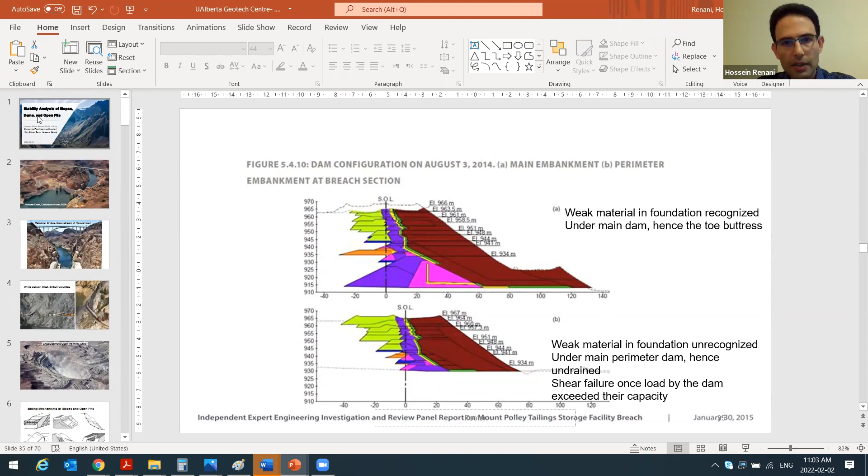Thank you very much, Lan. It's a pleasure to be back at the University of Alberta and share some of what I have learned in the past with my fellow students and professionals who have joined this meeting. Welcome, everyone. If you can please confirm that you can see my screen, I can proceed. Yes, I can see your screen very well. Can you make it in presentation mode? Great, okay, perfect.

So it's a pleasure to be here. Welcome, everyone. Today I'll be talking about stability analysis, which is a big part of what all of us geotechnical engineers have to do as part of our professional practice. It can be an important responsibility, and a lot of considerations have to be taken into account when doing these kinds of analyses. So today I'll be talking about slopes, dams, and open pits. After I wrote this title, I realized I'm going to be covering a lot of different ground. It's a very tall order, and each of these subjects could be covered in a full course or many books. So what I'll be presenting is just a brief look at each of these subjects, not extensive or exhaustive, just some parts of each problem that have been interesting to me and that I wanted to share with you today.

Before I proceed, I'd like to acknowledge some outstanding individuals who have contributed to my growth professionally and personally, and who have also informed some of the ideas I'll be presenting today. I'd like to acknowledge Dr. Derek Martin and Norbert Morgenstern from the University of Alberta, Dr. Evert Hoek, Dr. Ming Cai of Laurentian University, and also Dr. Loren Lorig and Pedro Varona of Itasca, as well as my colleagues at Klohn Crippen Berger, SNC-Lavalin, and BC Hydro. Now, what I'll be presenting today are my own views, and they may not represent the views of any other individuals or institutions I have represented in the past.

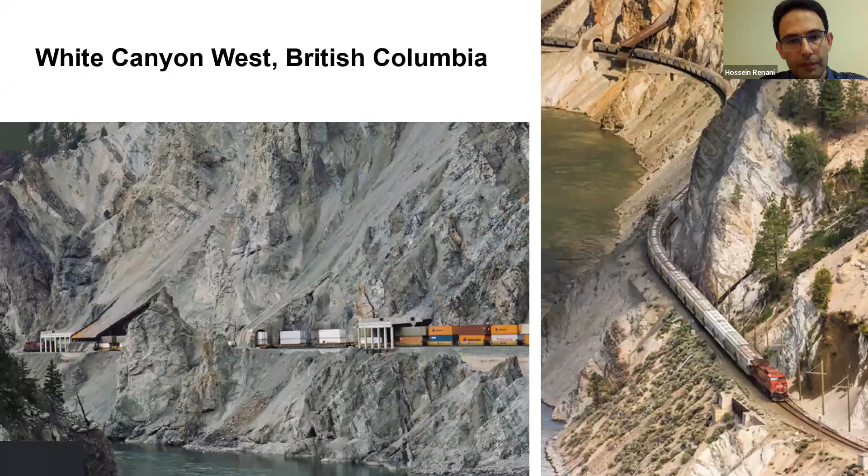And this is another example. So this is White Canyon West in British Columbia, and we have the CN Rail here. You can see that it's going very near the toe of a very high rock slope, and here you can see the train going through the loops. It's a very important route, and it's very important that these rock slopes stay stable and don't pose undue risk to the rail.

So again, that would be one of the topics and structures that we will cover today.

Okay, I just want to confirm this bar that I see below, is that blocking your view of some of the pictures, or do you see it without any? No, there's no obstacles, it's perfectly clear. So yeah, it's only on my screen.

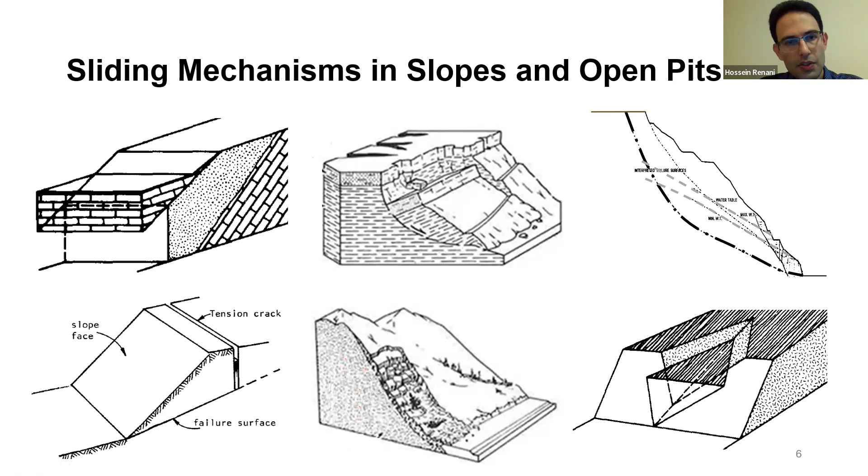And lastly, at the bottom here, I'm showing an example of a wedge failure, when we have two intersecting features creating a line of intersection which can daylight out of the slope face, and again, it's steeper than the friction angle of the surfaces, so it can slide out. This is the type of failure that we may observe at the scale of individual benches within an open pit mine or near a cut in rocks. As you can see, there are many different names and many different geometries, but as I'll mention later, they all have one thing in common.

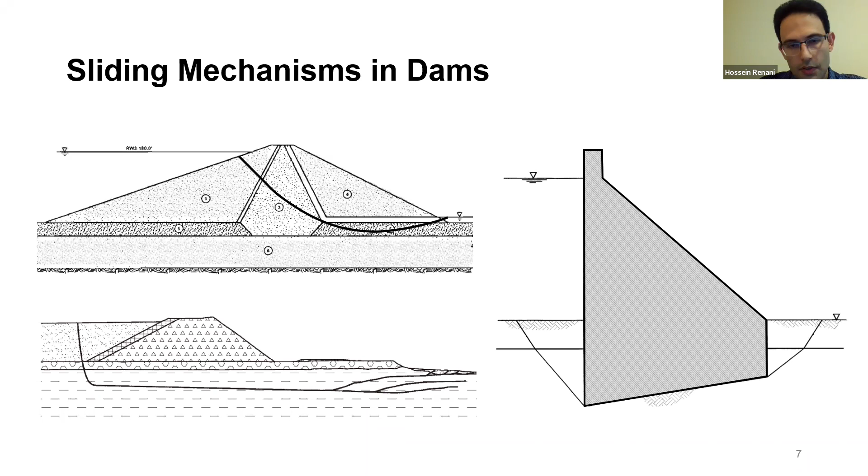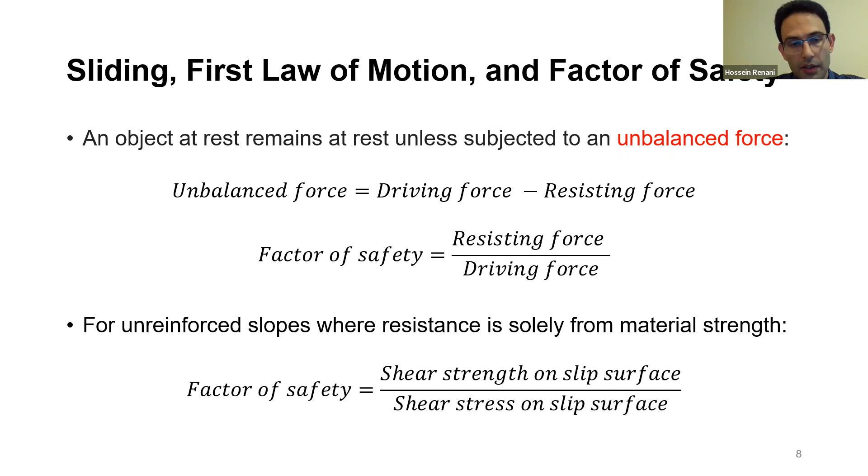However, if we do have some reinforcement, this equation has to be modified to the more comprehensive equation to calculate the factor of safety. That would be, for example, in a case where we have a dam and we need to stabilize it using some anchors or piles or what have you. That's when we use this kind of definition. But for many pure geotechnical applications, for example, if we are just looking at the body of a dam or embankment, which is not supported, this definition is adequate.

So now how do we calculate this factor of safety? There are different methods, obviously. Let's start with limit equilibrium analysis of wedges. Limit equilibrium analysis considers the condition of the system at the point of limiting equilibrium, meaning at the point where it's about to slide, but not yet, where those forces are at equilibrium. So we can have, for example, a single wedge analysis.

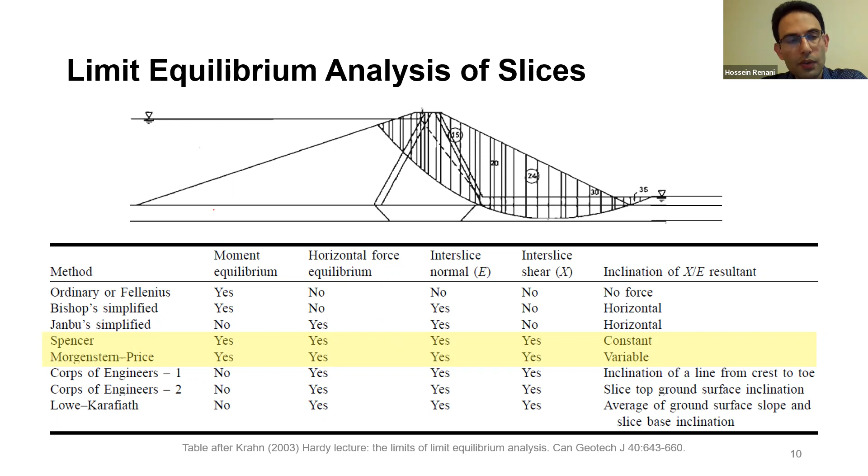So let's step back and see the main benefits and disadvantages of the limit equilibrium method of slices. The first advantage is probably that it's very simple and quick, and it requires few input parameters. Essentially, once you know your loads, the densities of materials, and shear strength parameters—cohesion or friction, or if it's nonlinear, Hoek-Brown parameters—you're good to go. And many engineers are familiar with this method, so there's less risk of making mistakes in the process.

However, there are some disadvantages which in some cases may be quite important. These limit equilibrium methods do not provide any information about displacements. Usually when we design any structure, we have some stability limit states, which consider the stability of the system—we call them ultimate limit states. We also consider serviceability limit states, which have to do with the amount of displacements or deflections induced in the system. So by virtue, this limit equilibrium method cannot help us with serviceability because it cannot give us any information about displacements.

It's only for ultimate limit state considerations. So it just gives us the factor of safety.

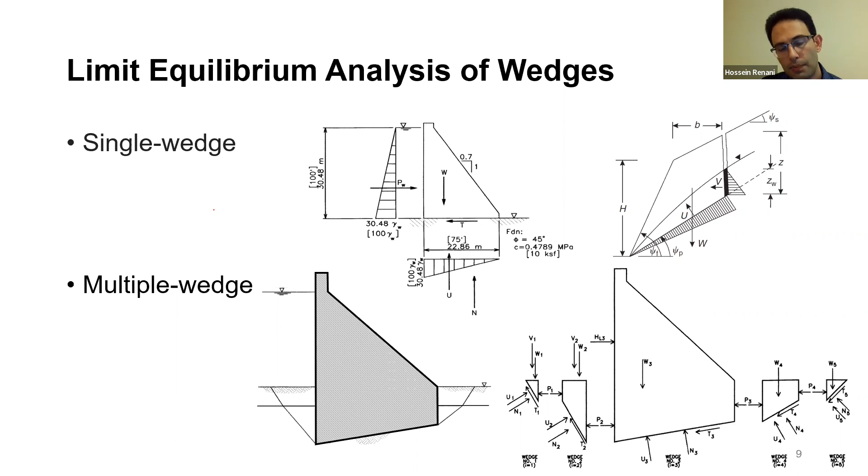So these strength values that we usually use as ultimate strength values are not strain compatible. They are not mobilized at the same strain. It is very possible that after slip has occurred on one interface, the strength on another interface mobilizes. So the way we currently do limit equilibrium analysis, neglecting the effect of strain, may not be quite correct in some cases.

Another drawback in my view is that it requires a trial and error search algorithm to find the critical slip surface, and that can be quite challenging for complex systems. If we have just a simple slope with one material, it's quite easy, and the search algorithms can quite easily find the critical slip surface.

However, if you have multiple discontinuities, a complex topography, and multiple materials in the slope, it can be quite an extensive and manual process to try different types of slip surfaces that you define as a user and find the most critical for yourself. Sometimes a modeler or engineer cannot find these most critical surfaces. I have reviewed many hundreds of stability analyses, and in most of them, by taking a closer look at the model, I have been able to find more critical slip surfaces. So this is a non-trivial concern for complex systems.

Now, the other drawback in my view is that it assumes the same factor of safety for all slices. Again, when we have a complex system made up of different materials, it may be possible that the strains are initially concentrated in one part of the system, overstressing them, and then propagate upwards, something close to a progressive failure. So the factor of safety may not be equal for all the portions on the failure surface.

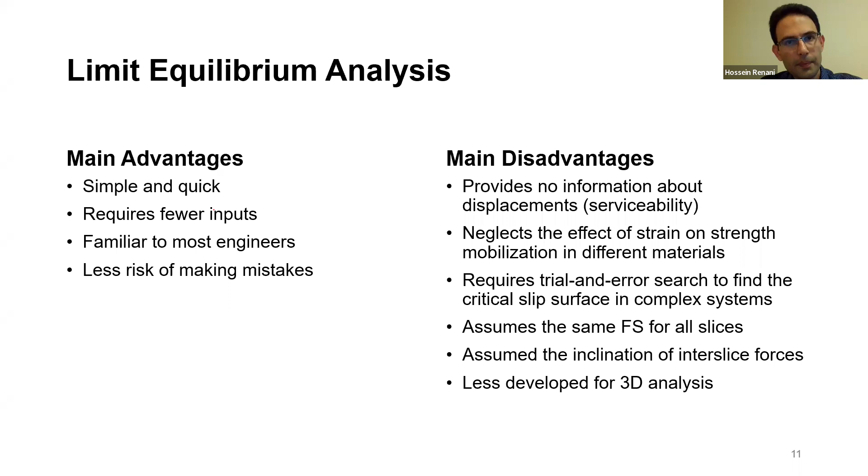There is another method that we can use, called the shear strength reduction method, to calculate the factor of safety of a system, whether it's a tailings dam, a rock slope, a soil slope, or an embankment. And there are a few steps.

First of all, we have to do a proper stress deformation analysis of the system with the original parameters of the system that we know are representative. Once we bring that system to equilibrium, we go through that shear strength reduction algorithm where we divide the shear strength of the material by a strength reduction factor.

As you can see, generally we can specify shear strength as a cohesive component and a frictional component. Here I have written it as a Coulomb type linear slip criterion. However, even if it's non-linear, we can translate it into an equivalent linear form, so this method still holds for nonlinear failure surfaces as well. Essentially we divide the cohesion and tangent of friction angle. By doing so, you can see from this equation that we are reducing the shear strength by that strength reduction factor. We then check if, with those reduced cohesion and friction angle values, we still reach equilibrium of the system or not.

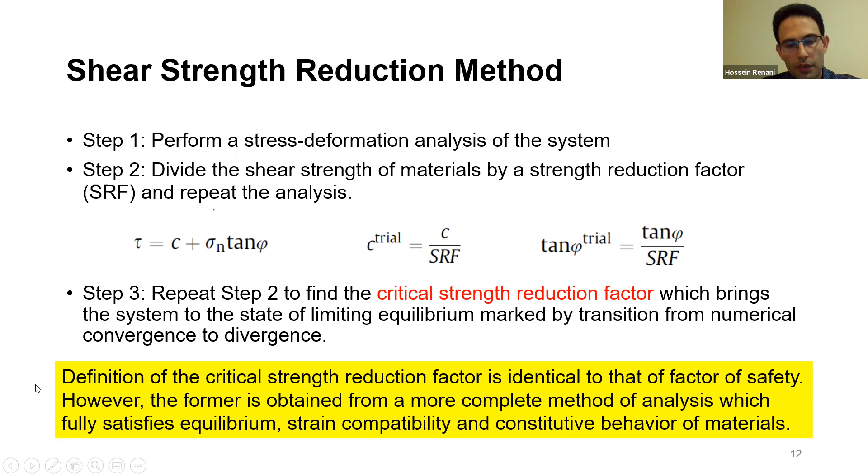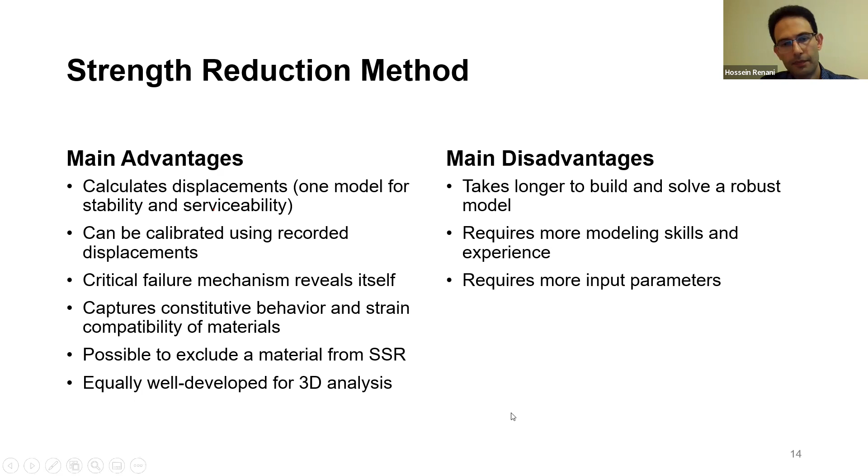So how do the results compare in 2D between these two methods? In my experience, limit equilibrium analysis and strength reduction method give similar results when we are dealing with 2D analysis of simple slopes, where the slope geometry and topography are simple, and the material is maybe homogeneous, or we have two materials, but the slip surface is quite smooth. In these cases, we get quite similar results from these two methods.

For example, here I have used a finite element model to calculate the factor of safety with shear strength reduction, which is 1.24. With limit equilibrium, it's 1.27. So for most practical purposes, they are the same.

However, if we have complex geometries, or where our material behavior is complex, or where we have a slip surface with some sharp changes - for example, here is close to a 2D section of the previous 3D excavation model that I showed you. We have part of the slip happening on the weak bedding plane, which is quite straight, and then a sharp change into failure of the material above. So we have a hybrid failure mechanism, and as you can see, we can get substantially different results. In this case, limit equilibrium gives us a factor of safety of 1.86, whereas shear strength reduction gives us 2.16.

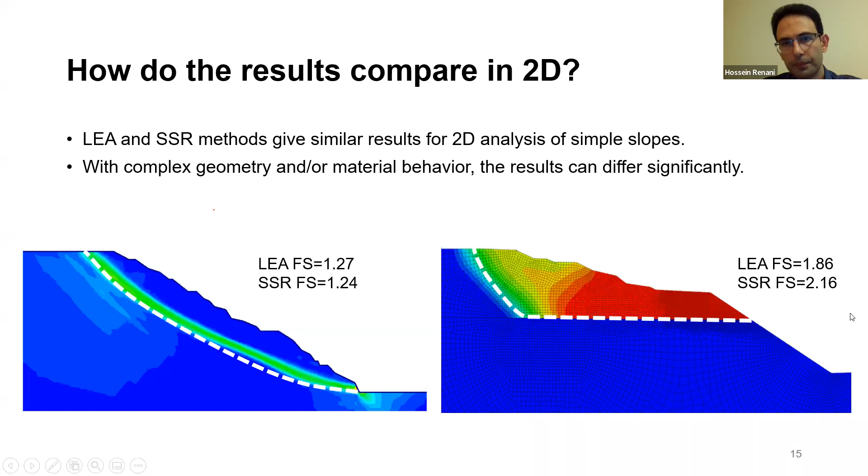Now, what happens when we go from 2D to 3D? Again, in my experience, as long as the slope geometry is simple, materials are simple, homogeneous, or close to it, the results are going to be similar in many cases. However, if we have complex systems, the results again can differ significantly.

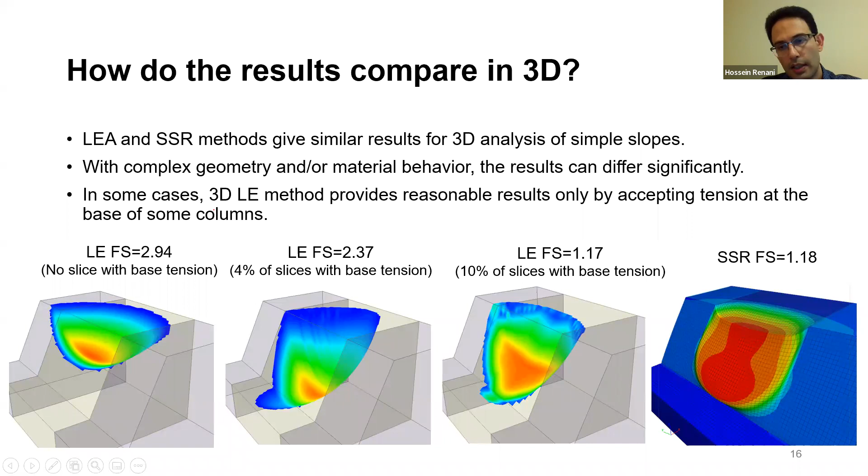All right, let's move to incorporation of strain softening. With limit equilibrium analysis, we can only assume one set of strength parameters because we have no displacement. So we specify one value for cohesion, for example, and one value for friction angle, and those are the values that are going to be used in the analysis. They won't change during the analysis.

However, in many cases, we have strain softening materials. So for example, this is one case of yellow clay reported by Skempton, where you can see at different levels of confining pressure or normal stress, we go up, we reach a peak, and then we come back. This is what we call strain softening. With increasing strain, the capacity of the sample reduces. So this would be our peak, and this would be close to post-peak. And if we continue this strain long enough, we get to residual.

So for each level of normal stress, we can get peak values and residual values. And if we plot them, we can get something like this. This is done for a blue clay reported by Alonso and Gens. So we can get one failure envelope for peak strength of the material and one for residual strength. And the question is, what do we do with this?

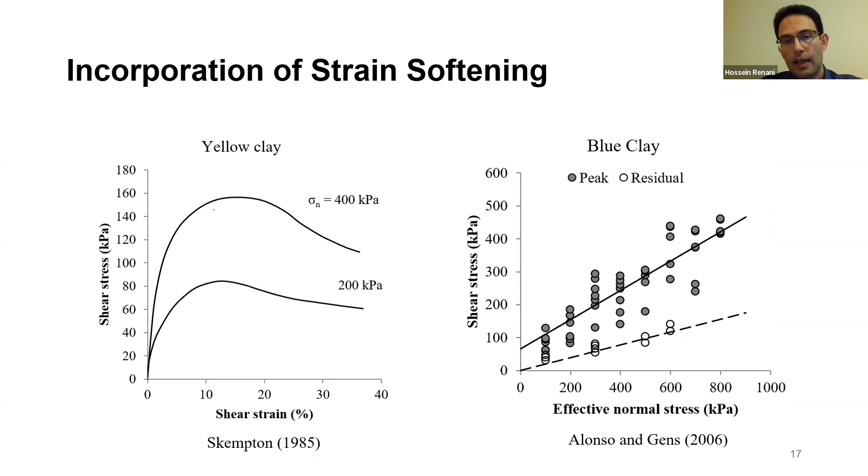In limit equilibrium analysis, we have to choose one set. And what usually has been done is that the peak values are chosen. However, we understand that that can cause some unconservative design, and in some cases, it has resulted in failures. So how do we solve this problem? How do we take this kind of behavior into account when we do limit equilibrium analysis? The answer is that we can't.

We can, however, incorporate it within the framework of a full stress deformation analysis, as we do with shear strength reduction method. So for example, here I have shown the slope, which is made of material which is strain softening. So we have our strength parameters starting from a peak value, and then as our plastic shear strain increases, they will be reduced, and then after some point, they get to a residual value. So those will be for both cohesion and friction angle. We go from peak values to residual values as plastic shear strain increases.

So if we assign such behavior to the material inside the slope, these are the kinds of responses that you can see. If we apply some normal force to the top of this slope, we can see how the load displacement behavior differs from a perfectly plastic model. PP stands for perfectly plastic. So as we increase the vertical stress, which is applied here, we can see that vertical displacements increase, and after some point, they will plateau because we have a perfectly plastic model. And that's what perfectly plastic means. It works also in the framework of the slope.

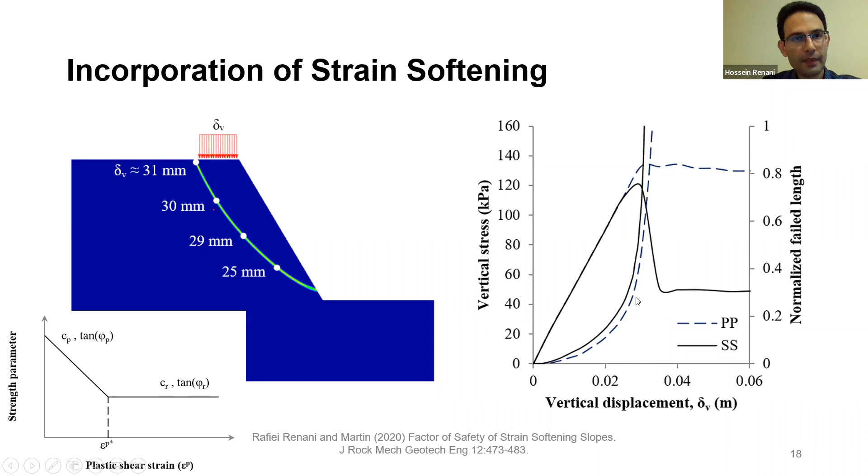So how do we incorporate this into the context of factor of safety? Essentially, we can do the same thing we have done for perfectly plastic models. For those models, our strength parameters, C and phi (tangent of phi), are constant — they do not change with plastic shear strain. If you draw them on this kind of plot, you'll have horizontal lines. So if our initial representative values are here, when we apply a strength reduction factor, they will be reduced — this line for a given SRF will come down to this line. Then we check if it's stable or not. If not, we decrease it further.

We can do the same where we have a strain softening material. However, they are not going to be horizontal lines — as I mentioned, we will have a decrease initially, and then get to a plateau. This plateau can be, for example, 0 for cohesion, but a non-zero value for friction angle. So for a strain softening material, with this kind of trend initially, a strength reduction factor greater than 1 will reduce it to something like this. We can do the same exercise for strain softening that we have been doing for perfectly plastic models.

This is an algorithm that we published to establish a framework to calculate the factor of safety for slopes or systems with strain weakening materials. On the right, you can see the effect. These two lines are for the perfectly plastic model — we have a slope with no loading on top, just the gravity loading of the slope itself, as it is in reality in most cases.

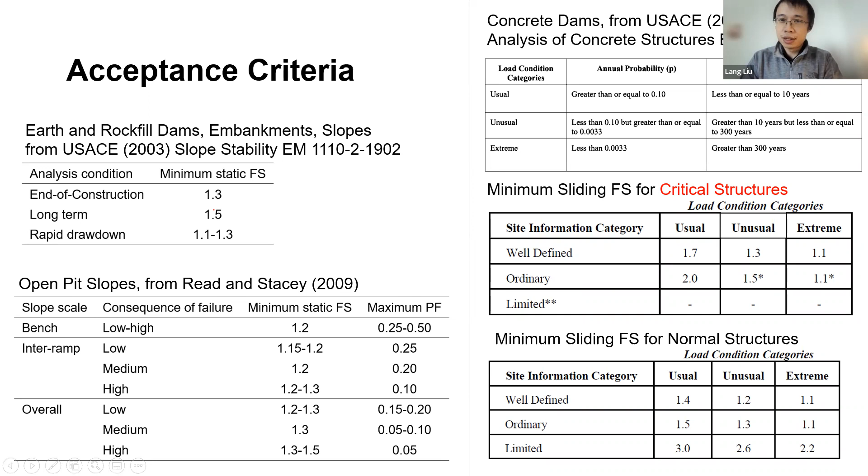Okay, great. So I don't really have any question coming up. Oh, actually there are two more here. So for scenario 2, he didn't say any equations between 30 and 45.

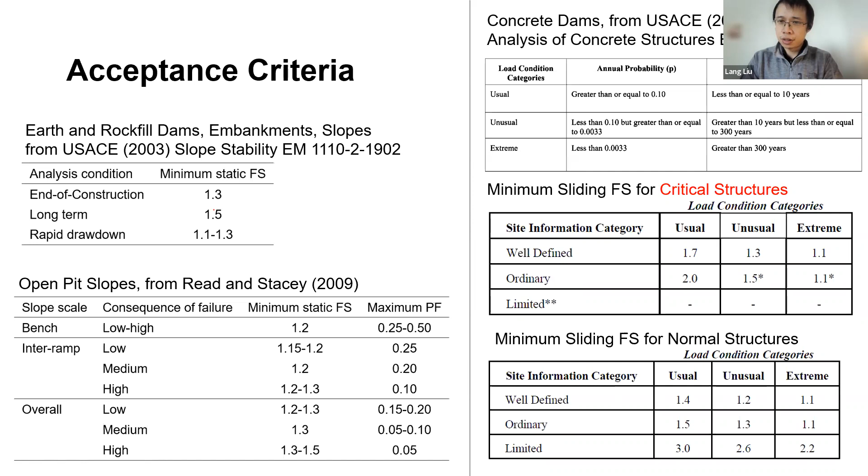Yes, that's correct. So essentially, these are the type of data we have for scenario number 2. For the case of a slope angle of 30 degrees, the results are all pretty much close to 0.42 for the factor of safety ratio. But when we go to 45 degrees, initially for very small values of peak cohesion they show an increase and then go back to a lower value. So you can imagine a transition between 30 and 45, going from horizontal to having a small peak, a higher peak, until we get to here. So one thing one can do is get the factor of safety ratio for the case of 30 degrees and also for 45 degrees, and if the slope angle in question is in between, they can interpolate those factor of safety ratios.

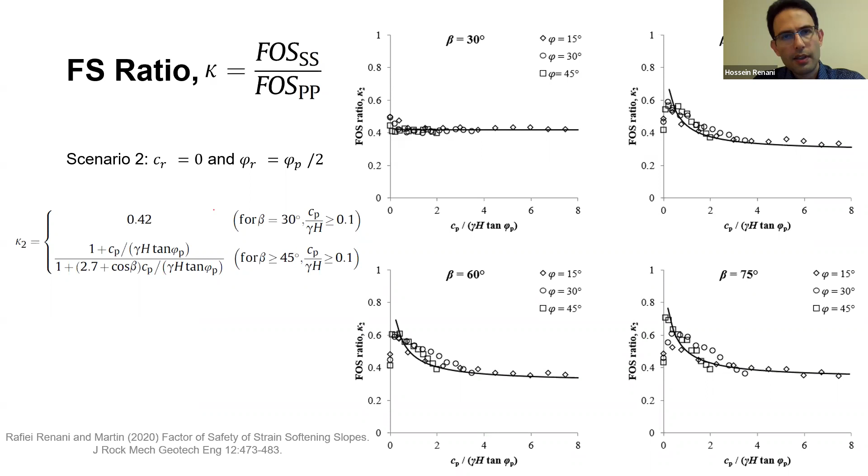I think he's referring to one numerical simulation example you showed here. Did this example show the displacement or other parameters in this contour?

Yes. So the contours here are displacements, but when we try to find the critical slip surface or sliding mass, we can look at displacements, we can look at velocities, and we can also look at the contours of plastic shear strain. All of them will give us an indication of the critical sliding mass.

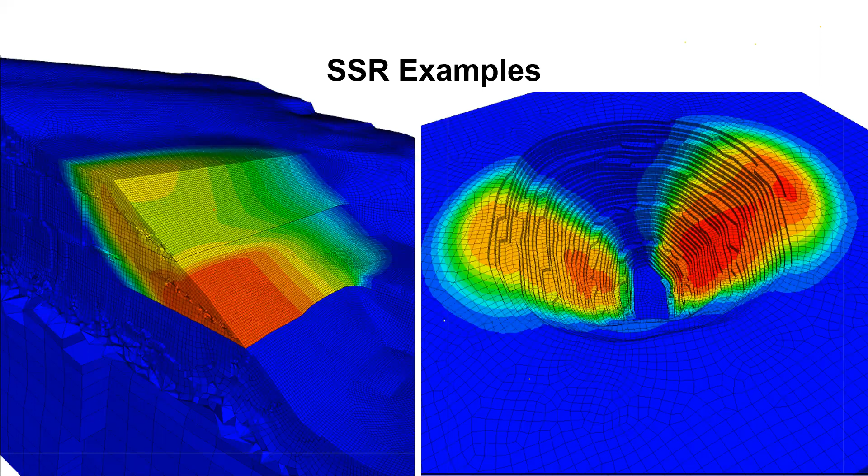Sure, I think I understand what you're getting into, because my understanding is that, as you mentioned, normally these are done using conventional methods, limit equilibrium with perfectly plastic materials, and the design guidelines are based on that kind of procedure. Now, if we are going to use these new findings and multiply those factors of safety by those ratios, then suddenly we have some low factors of safety on our hand, which may not be compliant. So what do we do? I think that's the question.

Exactly. My input is that we have had cases where this has not been considered, and catastrophic failures have happened as a result of it. For example, what happened with the Aznalcóllar tailings dam in Spain - it was the worst environmental disaster in Europe. It released a lot of really not good tailings into the environment, and that was because the dam was founded on a foundation which had some weak planes, and also had strain weakening materials that had been observed during all the laboratory tests, but that had not been considered for stability analysis. With their calculations, they were expecting the tailings dam would be stable even under seismic conditions - they had to have a factor of safety higher than 1. In reality, the tailings dam failed without any seismic activity. So that means there is a big disconnect between what they calculated using those peak values and what the reality of the system was.